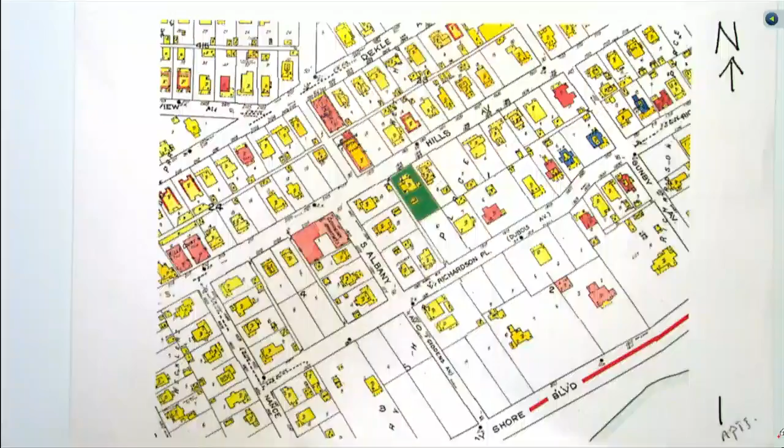This address here that faces Richardson comes off of Richardson. They don't use the alley for vehicular access, and neither does this one, and this one comes off of Hills. So that gives you the lay of the land about the activity on this alley.

Subject site is in the green box, faces Hills. The alley is indicated here, and it runs north and south. You see the infill property that's here, and then the accessory structure behind it.

This is the primary structure, and this is the front facade, which faces Hills. As we go to the east elevation, in the past they had put a shed component over here with an addition. Through the drawings this evening, you'll see that this is going to change, and this will have more of a gable roof line to mimic the historic structure.

This is moving to the west elevation. You see the original structure here, and then a series of one-story additions as it telescopes to the rear. This is the alley side, which is here, so this is the property in question over here.

As I indicated, the abutting property across the alley to the west, they don't use the alley, they come straight in. As you get a little deeper into the alley, you have the non-contributing accessory structure that's there. This is one of the better alleys as far as the condition of the surface.

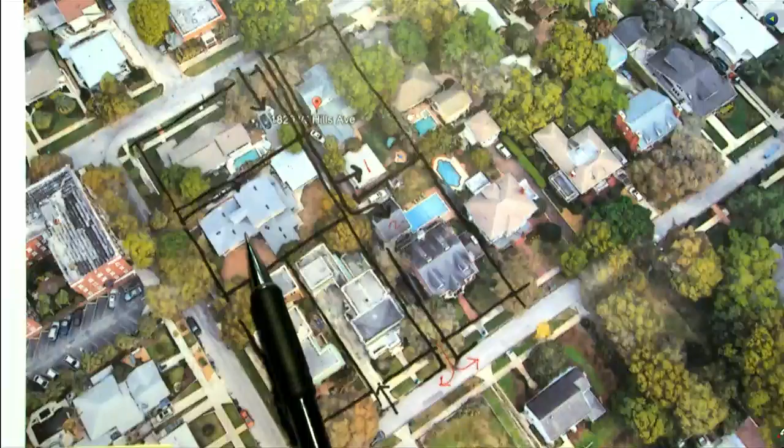I'm going to show some similar pictures to what Ron had shown. I'm trying to emphasize here that of the 5 parcels that are adjacent to the alley, only ours and the ones immediately behind have garage access off that alley.

And I'll show on this alley elevation, I've got some good images of the 2-story detached accessory structure to the south.

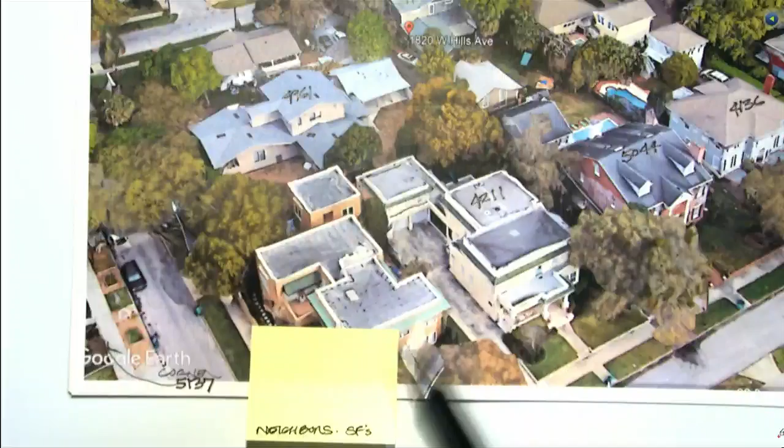I went to the property appraiser's website and downloaded this Google image. This is the property, and I wanted to just quickly look at the scale of some of the larger homes nearby. These are gross square footages that are identified: 4961, 4211, 5044, 4136, 5052, and over on this corner, not on the map, is 5137. So there are some large-scale homes immediately surrounding ours.

You can also see quite a few 2-story detached structures.

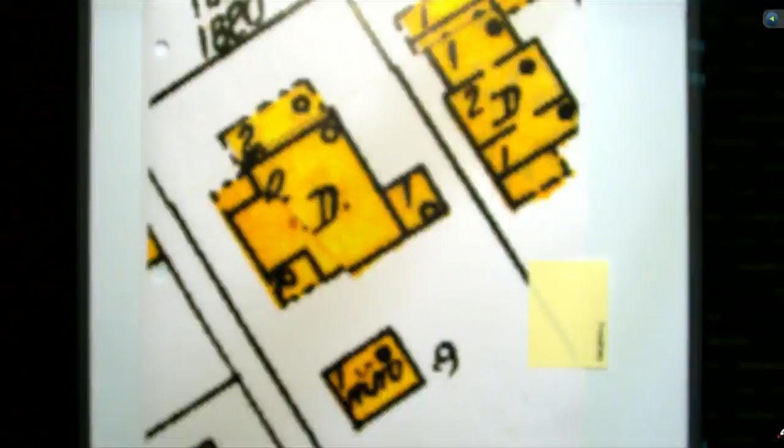This is an enlarged version of the Sanborn map, and I just quickly tried to get the accurate scale. This is the demo plan that I'll show you next. And you can see this is the original home, and part of what's now a carport appears to have been a one-car garage. So most of our demolition includes everything beyond this point here.

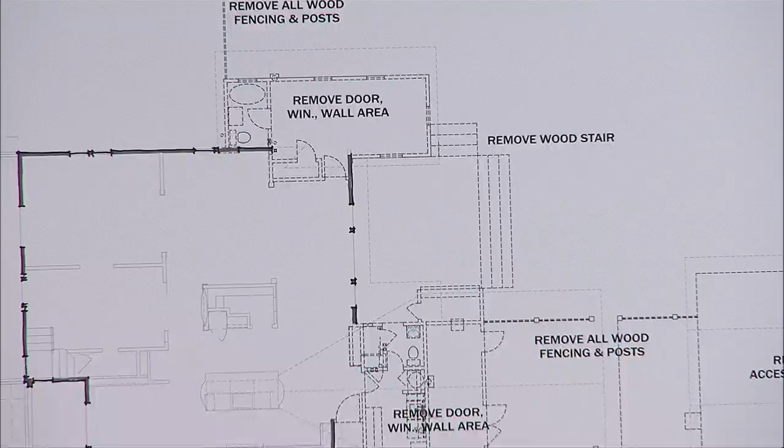So this is the demo plan, which includes removing the accessory structures, which is one story and very low, and has a lot of water problems.

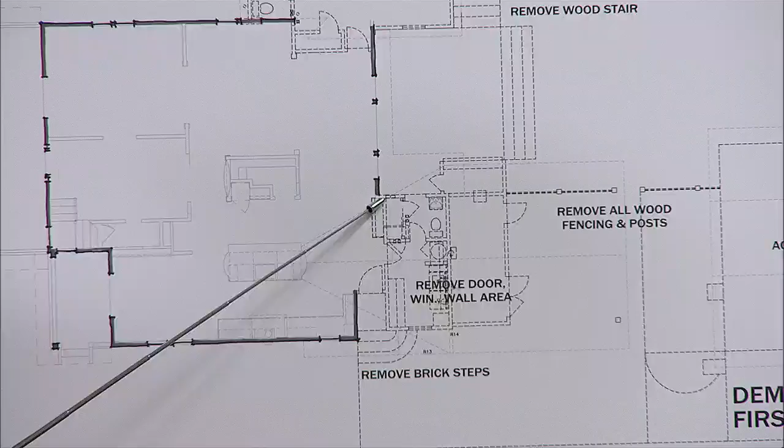Fencing, which divides the backyard, one generous one-car carport, covered storage, and part of the remodel was laundry room, powder bath, raised ipe deck, and this was an addition at some point other than what was original on the Sanborn map, but it's a step down, it's a low ceiling, the windows are smaller scale, and you'll see more of that as we go through the drawings.

So our goals are to maintain a large and private rear yard, two-car garage, laundry upstairs near all the bedrooms, larger covered outdoor living, outdoor kitchen, and additional bathroom. So with those goals in mind, how do we move forward to achieve them?

Proposed location for the addition. We demo the infill areas with multiple roof forms and differing materials. We've got metal, we've got shingles, we've got canvas awnings.

Here again, Ron showed most of this. You've got a lot going on. A good part of this view is disguised by the oak trees here, and there's a large one in the neighbor's front yard.

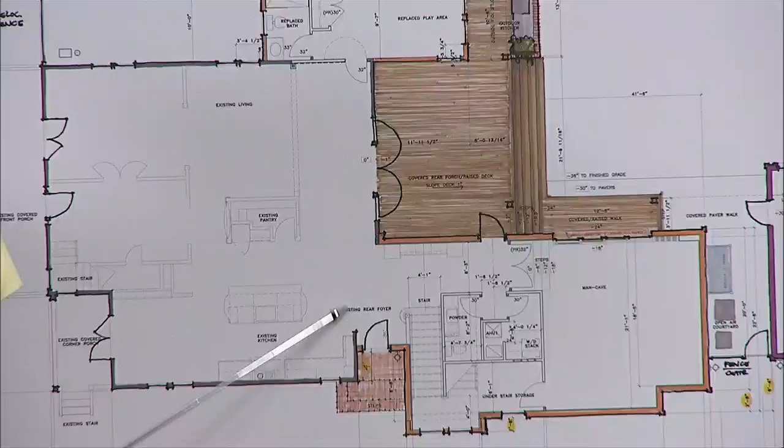So we're starting over again right here with a recess, a 4-foot recess. Then we come out and there's a 20-inch cantilever of a stair landing that takes us right to the 7-foot setback. Then we step back 20 inches. Then we step back another 32 inches.

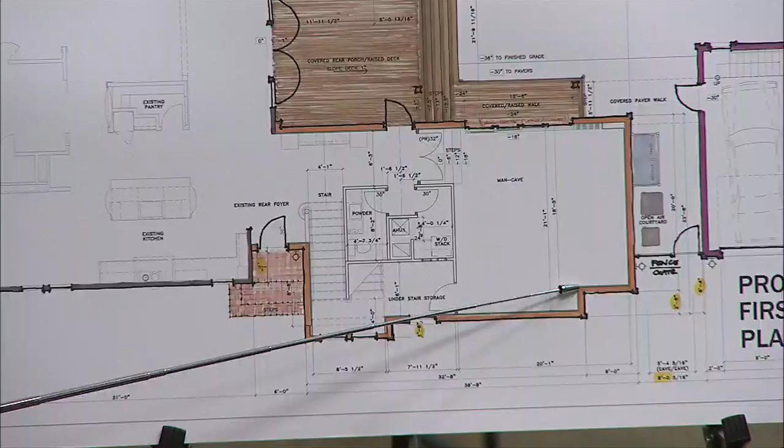Then we've got a space of 8 feet to the detached accessory structure, which is set back 15 feet from the alley property line. Currently, the detached accessory structure is only 11.5 feet.

Once again, there's quite an undulation of the facades here. We match that 4-foot recess where we start the addition, and we're coming out over the stair landing, which allows us to do 2 symmetrical bedrooms and arrive at the center line of that 2-story mass.

We step that back. We've got a window pattern that relates to the pairs all the way around. And the space now between the end of the 2nd-story addition and the detached structure is 18 feet. The 2nd story over the detached structure is set back 4 feet from the outside width of the garage.

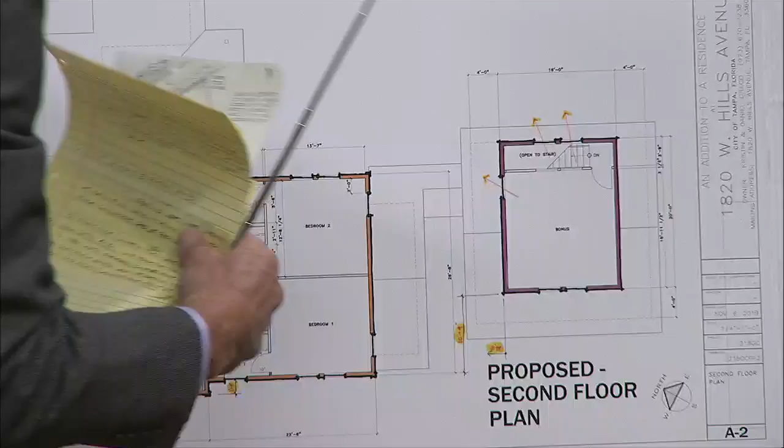Front elevation. We're going to rebuild the left north bedroom, which is here, existing, and we're going to reverse the slope with a perpendicular gable. We're going to match the floor elevation. We're going to match window head heights and match ceiling heights.

I've shown the approximate height of a 6-foot fence that we're going to relocate. There's the property line. On the right side, the only thing you'll see is you've got the recessed side entry, and then this stair landing projects out to the 7-foot setback.

Now, we'll probably spend quite a bit of time on this elevation. This is the alley elevation. The large oak tree that's on the property is approximately here.

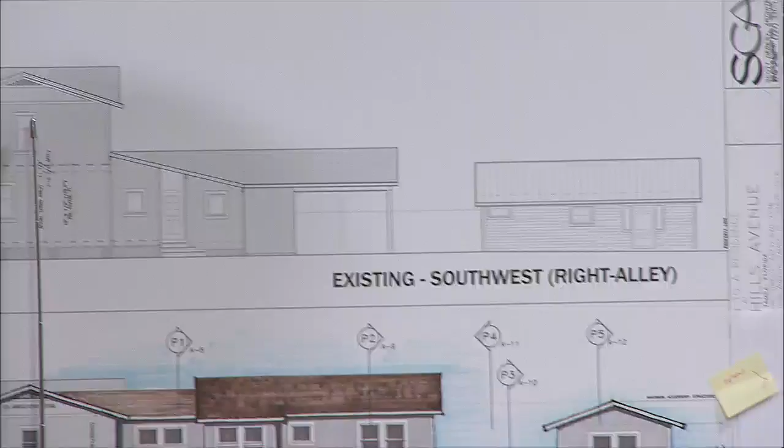Now, I've tried to render completely only the addition. I haven't put the gray color on the existing, but I have highlighted the windows. Okay, we start the transition with the recessed entry that's 4 feet back.

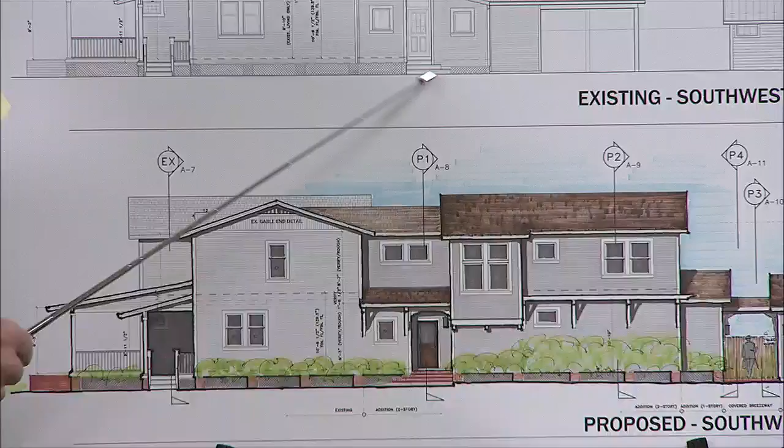Covered side entry, as it currently exists also. It's right here, we've got the recessed entry, but this is a little bit more generous. We also set back the 2nd story 4 feet so that this gable end is still the most prominent part of this elevation.

This is laundry room, which explains, there's a counter immediately underneath those windows, which explains the height of those windows, or the fact that they're more square than vertical.

And we introduced knee braces here that give it kind of a human scale element, which we repeat farther down as kind of an arbor that projects out about a foot to break up the 2-story facade here. So this projecting stair landing is coming at you 20 inches.

One more step here at the end, and we transition down to a 1-story roof before the space, which has a breezeway connection near the back of the space, and then the 1.5-story garage starts.

So as a composition, you've got the most prominent gable here, you've got what we feel is an interesting facade here, and it transitions and gradates and comes back up with a minor gable here, and then kind of ends the composition. And we hold that 5 feet from the rear property line, which is consistent with where it's at right now.

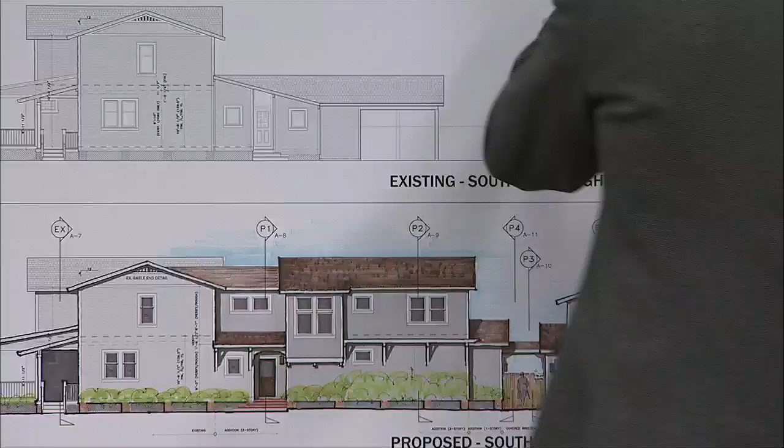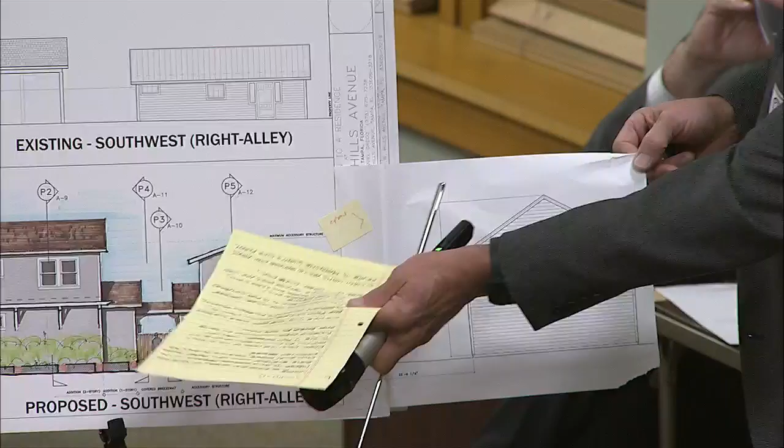I physically measured the neighbor's detached structure. It's 23 feet away from the property line and approximately 26 feet high. I felt it was important to show the massing that's adjacent to what we're doing.

I think this is a very acceptable 1.5-story accessory structure compared to this one. We repeat coach lights at the side entry, one on each side of the garage front, and also in line in this courtyard area.

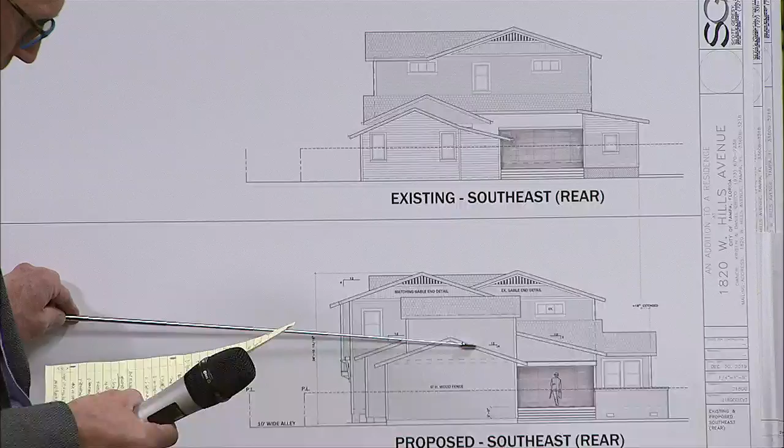We feel it's important, to be sensitive to the neighbors, that no windows would occur on this back elevation, which is 5 feet away, 9 feet away from the neighbor's fence, looking down into their rear yard, both from the garage and from the 2nd-story loft space.

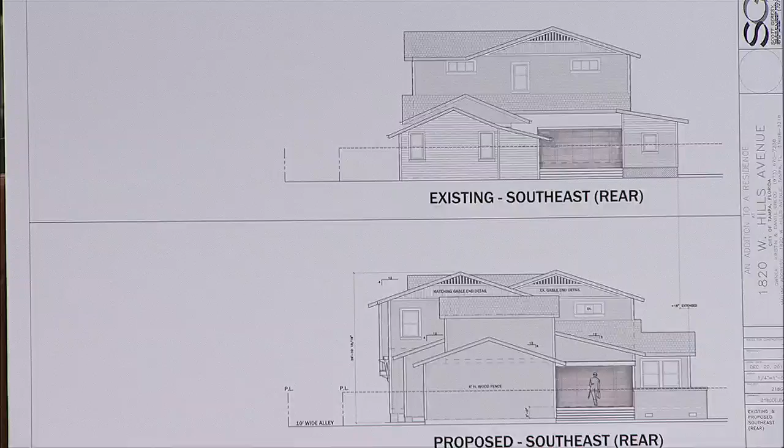This is the elevation in the backyard. What was existing was the lower floor, the lower windows, rafter tails exposed only here on the entire project. You've got metal roofing, and then back here you've got another canvas awning.

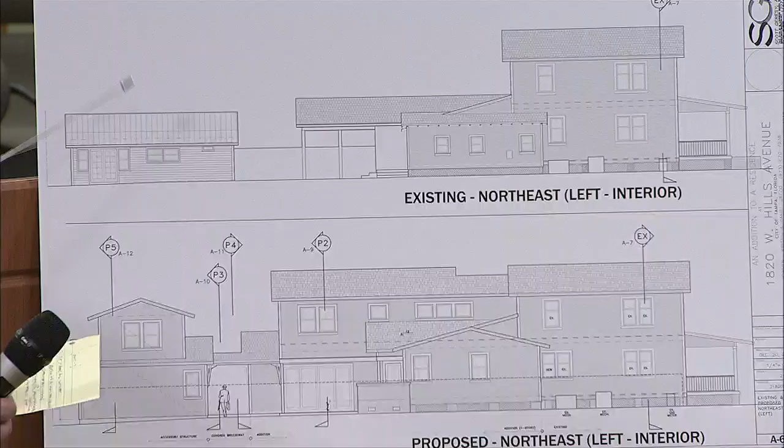So we feel the improvements are: we're now matching the floor elevation with this playroom, which is really rebuilt in the same spot with a gable, perpendicular gable, coming at you instead of facing the front. Better matching window sizes here compared to these. And we feel the accessory structure is an integral part of the whole composition compared to what it used to be.

And we're going to relocate. There's a fence coming off right here. We're going to move that to the front and it'll conceal these mechanical units, and I'll show you pictures of that. There's also a gas meter there.

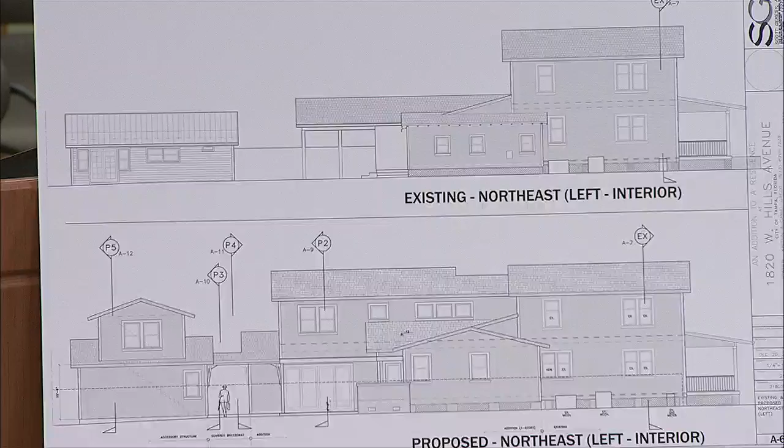Site improvements: new fence, utility and trash area with the gate. In between now, we've got new fencing that occurs here. The existing fence is here, we're moving it to here. We're continuing that wood fence there. The fence and gate reoccur here, which creates a little courtyard for new mechanical and trash between the two structures, and a gate wood fence here. So you've got fenced area all around here.

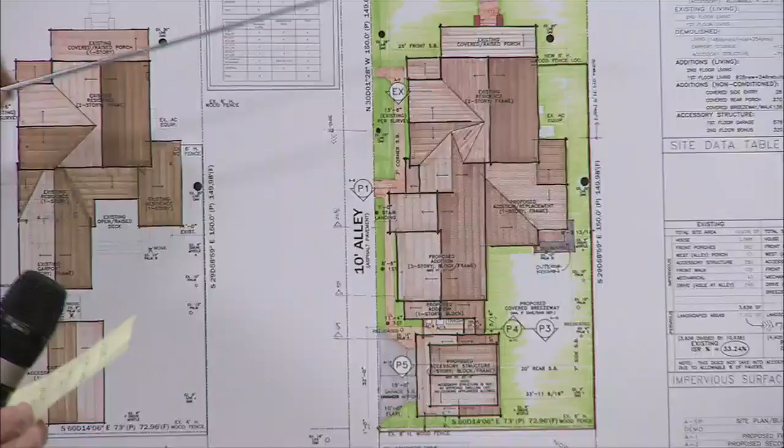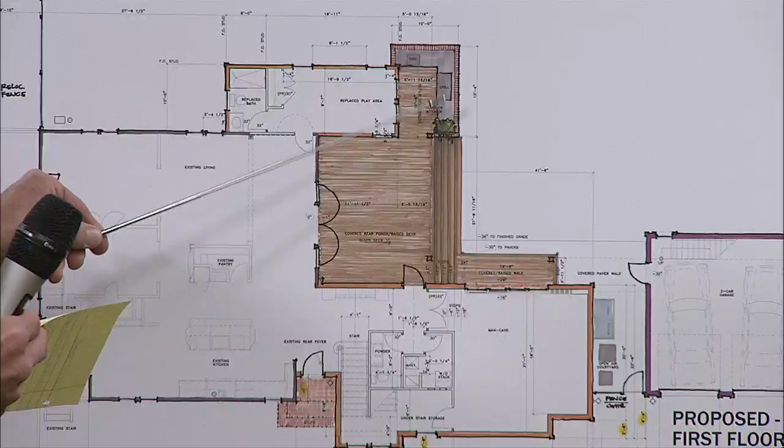We're also doing an outdoor kitchen in this area, which occurs here, just an extension of the deck. The roof overhang is here, so that's uncovered area. We've got a grill and sink, all kind of open to the backyard.

The rehabilitation of the primary structure: in 2012, we had new roofing and exterior painting occur. Stem wall.

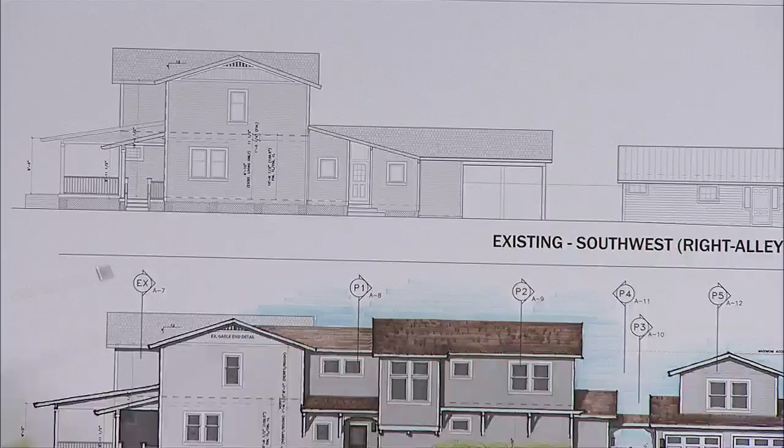I'll show you some pictures. We've got some brick piers, some block piers, some precast piers. All of those are covered by a white plastic lattice completely on the outside of them. We're proposing to re-express those, clean up the brick that's there, put a matching thin brick veneer over the block ones to keep them as flush as possible, and then repeat the red brick veneer on new concrete block piers where we've got the new addition.

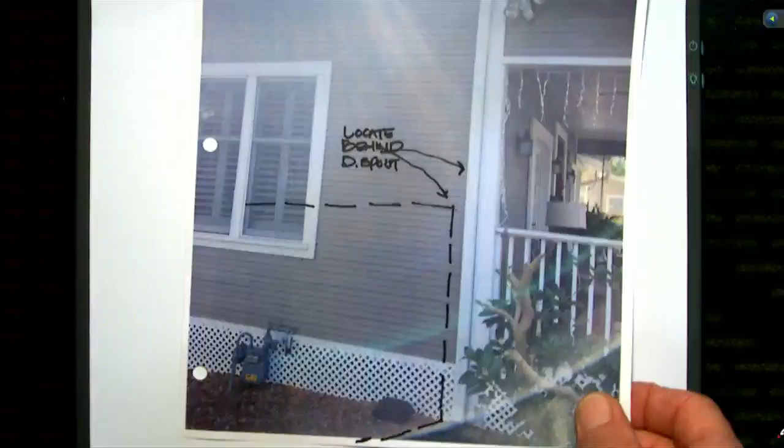Fencing: front left side of the house, this is the one-story addition. You can see the mechanical units. Closer view: we're going to pull this fence forward to this spot here, which is behind the tree, and it hits that corner of the house approximately there behind the downspout. There's the meter.

Details. Our design detail vocabulary includes 4 in 12 slopes, flatter at the front porches with shingle roofing. Typical overhang.

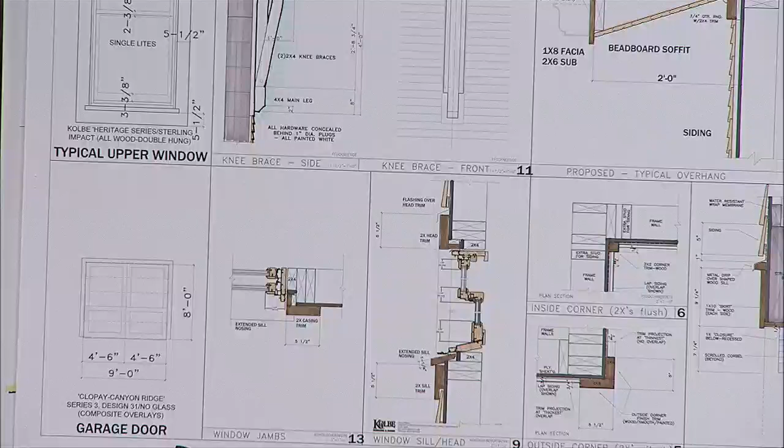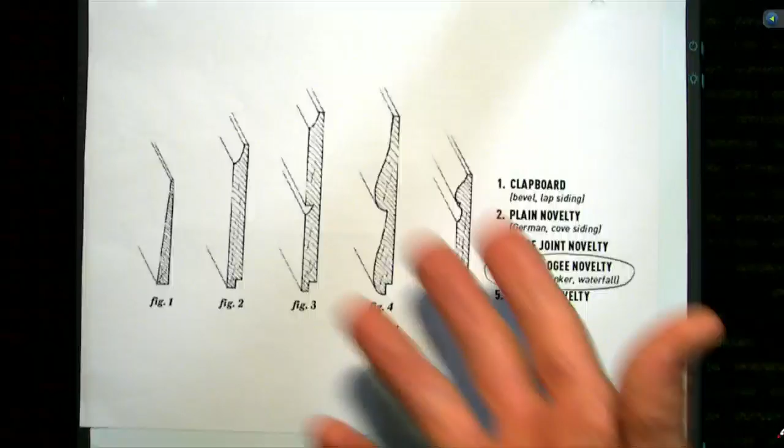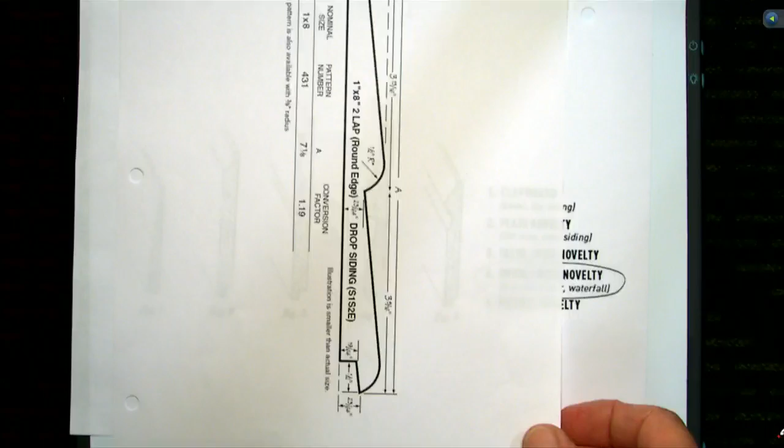Our siding is 5 inches, and in this example they call it a double ogee novelty Boston Clinker waterfall. Here's another dimensioned manufacturer's cut of it, and here's another one. You see quite a bit of that in the immediate area.

Windows, Kolbe, wood. This is an exterior wood product that's got a Kynar 2 finish on it.

Front door, very nice, dark stained wood, 2 panel, 6 light front door. The existing side door is now that, and on that elevation our intention is the new side door would be a natural wood stained 2 panel, 1 light door also.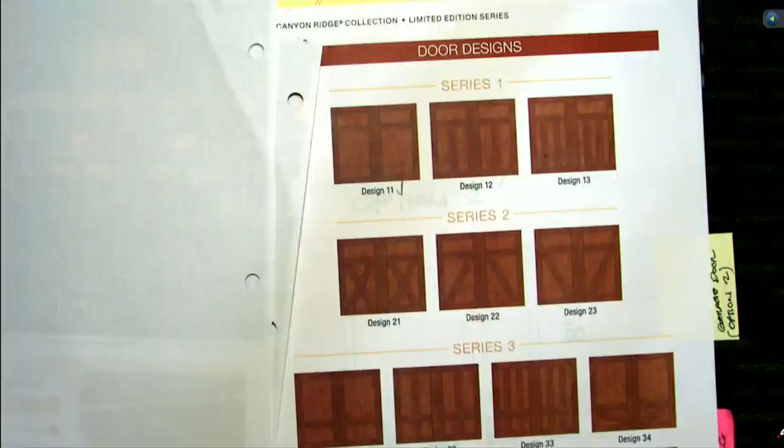Garage door: Canyon Ridge, it's an aluminum door with a composite grain trim on it. I'm showing 6 panels with 2 lights, with 3 lights each. Or...

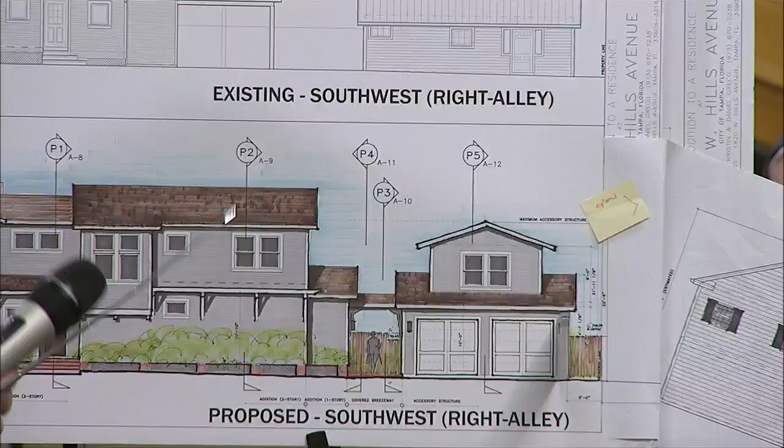This look is 2 columns, 2 panels - it's a little squattier look, and we're prepared to go either way. This would be a more costly door; obviously it kind of extends it a little more vertically.

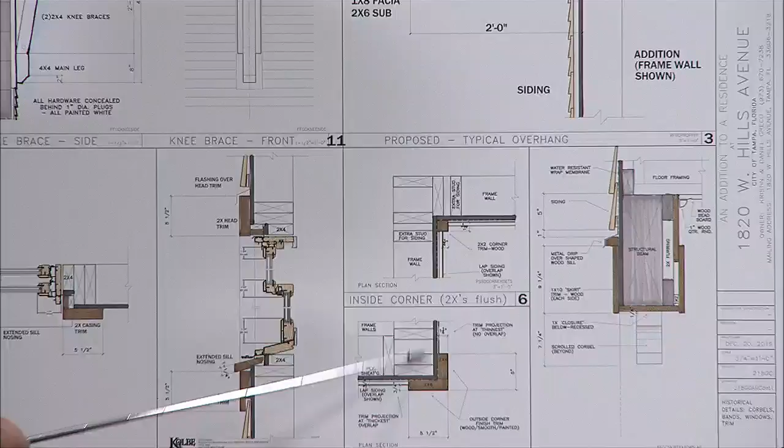So, details. There is the typical overhang we're proposing trim here. There's the waterfall siding, beadboard soffit, fascia, where we've got overhangs, 2nd-story overhangs over covered walkways. We do a skirt board trim, all painted white. Outside corners with 2 bys, so the minimum projection where you've got lap siding is 3/4 of an inch.

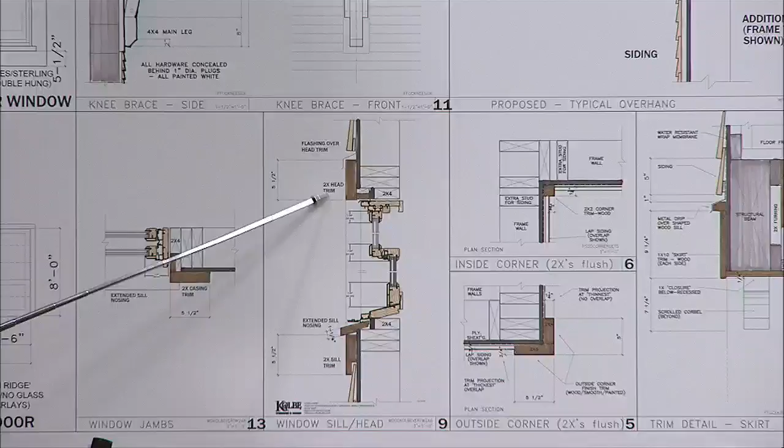An interior 2x2. Here's the window section detail where we've got 5.5 inch trim underneath and an extended nosing, 5.5 inches up top, and just a metal flashing over top. This is the most consistent detail on the house, and casing trim is 2x6.

Corbels. We're doing this with a 4x4 main leg and 2x4 knee braces sandwiched on each side, with a 4x8 corbel here, and two 2x8s atop.

I am finished, I think, and ready for questions. Thank you.

Good evening, Commissioners. Ron Vila, I'm staff with Historic Preservation. Staff's finding that this project is consistent with the Hyde Park design guidelines with the previous plans that were submitted. There were some modifications made between the submission date and today's public hearing. As Scott alluded to, we met many times to have these drawings consistent with our criteria.

As we go to page 3 of the staff report, I wanted to address some of our earlier concerns, reflected in the bullet items. On the original plans, there was no dimension on the alley side where the addition was, and we had some concerns that there might be the need for a variance. After further review, there is no need for a variance - this whole project is moving forward with no variance request.

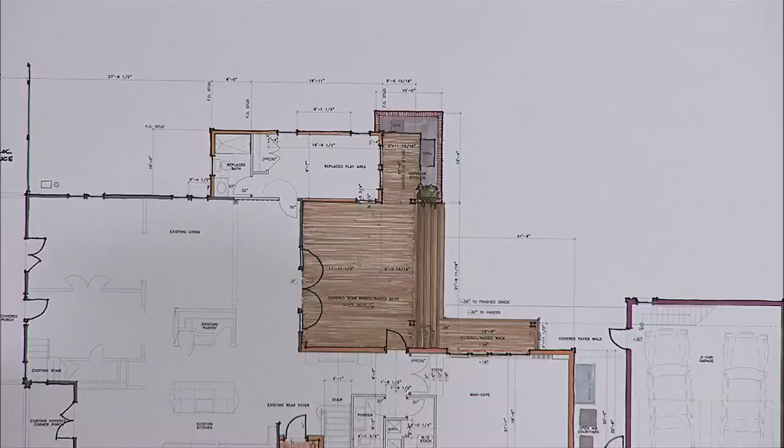Let me start by saying I rendered the existing roof plan only to make a point, which I'll get to at my closing. Right now, this is Chicago brick paver sidewalk here, all Chicago brick pavers here, and this becomes asphalt to here—so basically this is all paved now. In the end, we've got the same Chicago brick sidewalk, which we extend here. The new steps coming down out of this side entry are Chicago brick to that walkway. Then a minor walkway continues to this area, which is in the courtyard, and then a concrete apron.

We've discussed the right material for this and the abuse this alley gets with the trash trucks—they just spent a lot of money on that alley. So am I to understand you'll be salvaging a lot of this existing Chicago brick for reuse in other locations on the site? That sounds wonderful, yes. Is that your intent, or is that something we should bring to the table? Yeah, we may have to sell some of it.

Sure, I've got some pretty good pictures—I can show you the amount that's there now, and also the new walkways. You're augmenting this, I guess, with the apron and driveway with a colored dimensional concrete brick block surface, or is this going to be a monolithic concrete surface?

That's to be determined. Thank you very much. We're open for suggestions—I'd like to see at least the same brick border if it's a concrete apron. Thank you very much. Thank you.

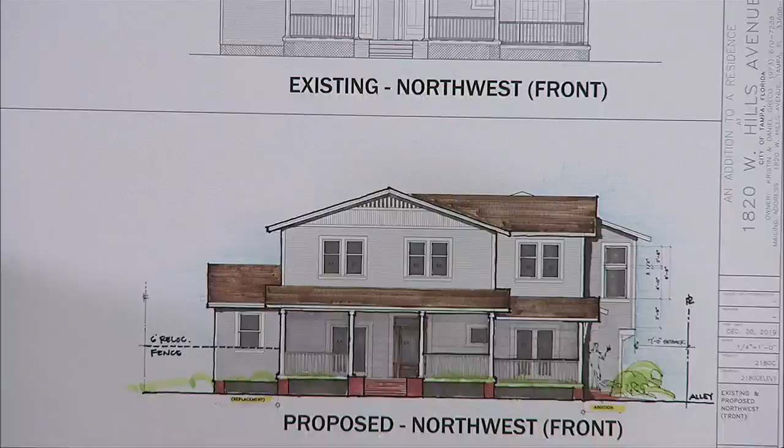I'm just curious. Can I refer to this? Yeah, sure. I have a folder full of schematic sketches and virtual model images studying this, and that probably represents half of what I actually did. And we did explore a two-story form here.

We weren't trying to squeeze as close to the setback as we could. And these push and shoves probably started out at 4 feet and then became 2 feet and then it became a little bit less.

So that little 20 inches really made a big difference at your arrival point upstairs. And I think it's kind of an interesting projection personally. Okay.

And then while we're at it, this is another elevation I had some questions about. I may have missed it, you may have said it. The brackets, what kind of material are those? Are they wood or metal? Painted wood. Painted wood? Yeah.

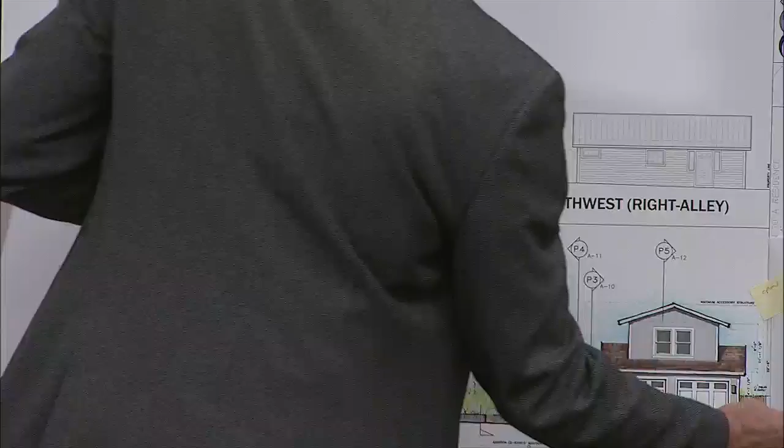Okay, great. And then you answered my question about the stairs. I would just list a preference, not really a question, but I do like your first doors with the windows, but we can discuss that as a board later.

On the left elevation, Ron mentioned this, the doors. Did you have a sample of those doors that were sliding at one point, but maybe no longer? Well, I don't, I'll show you my markup on the plan.

Here are those doors. That's four single light panels, and that is a man cave. Delightful. The idea is that it's an indoor-outdoor space, versatile.

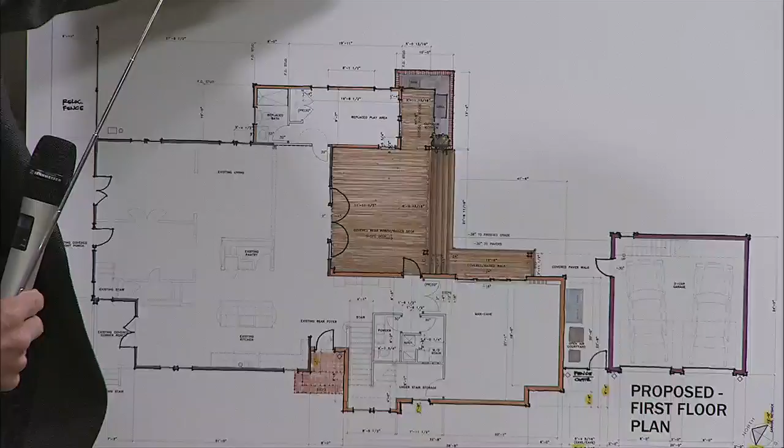I can't tell you what manufacturer it will be, but it's a single light panel. Okay.

Can I ask one question on that real quick? Yeah. Besides sliding doors, have you looked at a system like an accordion where it looks like 4 doors? Yeah, that's possible, getting that to stack.

There's not a good spot. Here's stairs coming down, so stacking it here is in the way. Stacking it there is kind of dangerous. Maybe stacking it here would be okay. I got to believe that an accordion door is going to be more expensive than a sliding door that ends up in the same plane.

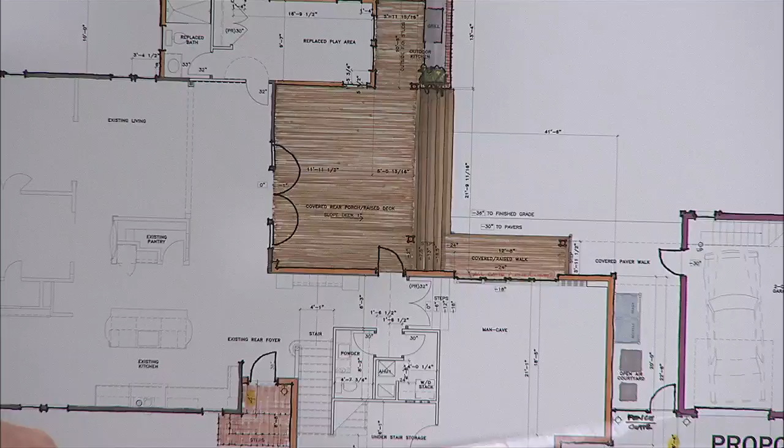Okay. To your accessory structure, is there a reason other than privacy to not have windows that face the adjacent property? Let me start with the ground floor. I'm glad you asked that question because I think there is. It's not an oversized garage, it's 24 feet square, and I showed standard size vehicles, and we're trying to get a 3-foot wide stair going up. This seemed like a logical spot for a window facing the backyard.

As you start to go up the stair, you get a quick peek in the backyard. The only remaining corner of the garage for storage is here, and it's going to be jam-packed full. So I think we'd like to give up on a window there because it's just going to get really disgusting. The second story...

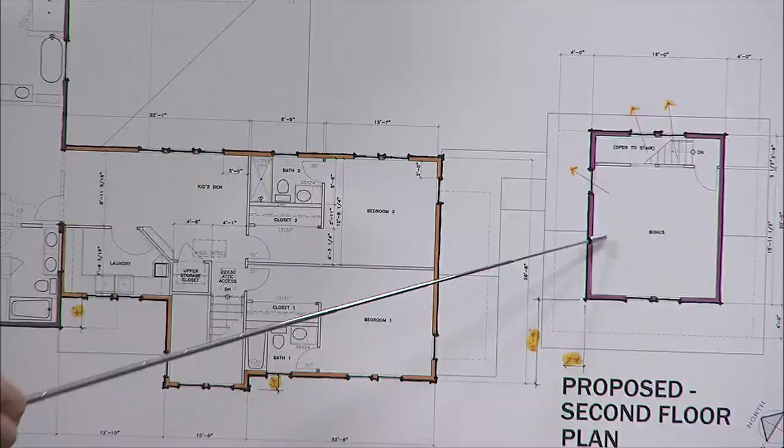It's one space with the stair aisle or whatever. So if this is conditioned space, these windows here will look out these windows. We got a window here, so we're really encouraging the views to our backyard, which is why I've highlighted those arrows. We've got a pair of windows here, a window here, a pair of windows there. The only place we don't have windows is here.

Is there a couch wall? Is there a TV wall? That's probably a couch wall or a bed wall.

And do you have the photos of the original accessory structure that you could put up again, if you don't mind? You want to see the ones with the windows? Yeah, that one. And did it have windows on each side or no? It does. Okay.

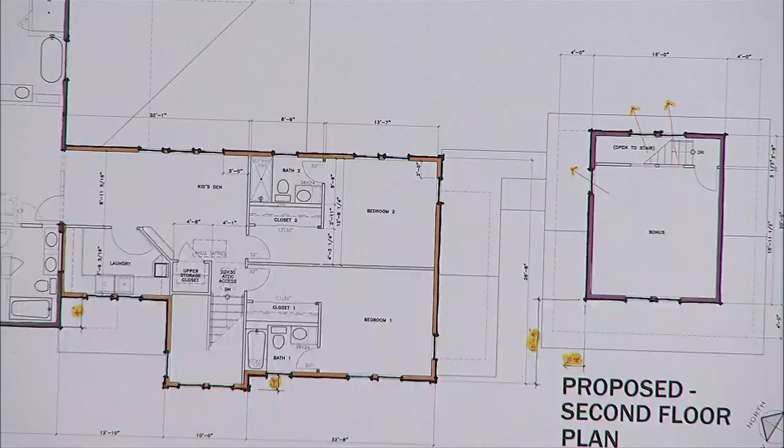Yeah, there are two, probably single hung windows there. Okay, great. Thank you, that's all the questions I have for right now. I think you've answered all my questions. Those windows, and same as far as the garage door is concerned, I like that first one with the 3 lights. That's it.

I have a few questions. First goes to precedents, so there's a couple. The corbels and the bracketing are not consistent with the primary structure itself and in the existing conditions. I was wondering if you have a series of precedents or case studies that show any in the district that are consistent with the vernacular frame style that this home is in, as well as the projected condition for the portion of the stair for the new addition. Both of those elements seem very foreign to this project. So if you have that case study precedent, it would be great if you could present that.

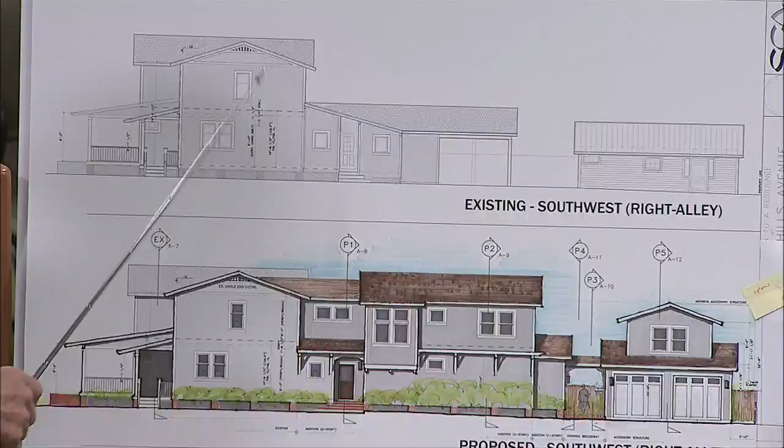Oh, part of the remodel in 2012 was a kitchen remodel, and the kitchen counter is continuous here, so I can't change that. And you were retaining that in the project? I'm sorry, can you go back to the plan? Yeah, I don't tend to look too much at the interiors when we're presented all of the conditions, because we're not really seeing that second story gable, the edge of it is there. Okay, and this was part of the 2012 project, which is very nice.

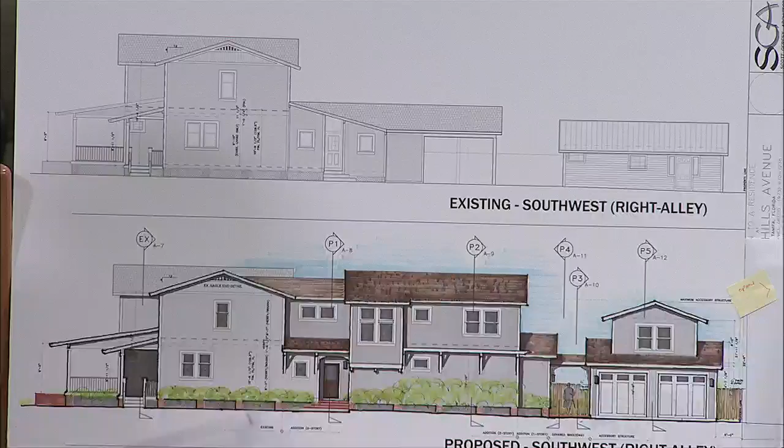All right, okay, that makes more sense now. That's it from, I didn't think maintaining the trim there was important. Maybe a tall tree or something there would help. That's it for my questions and comments right now. Thank you.

I also have a couple questions for you. So the proposed southwest, or right alley elevation, that's up on the board right now.

I have a question. So the landscaping that we're showing on this, that's on the new two-story addition, is that to hide the fact that there's no windows on that wall? Yeah, there's about 3 or 4 foot wide planter there adjacent to the building, so it's probably a ligustrum or something hedge.

Was there discussion at any point to include more windows along that first floor of the new two-story addition, to break it up a lot? Yeah, there was discussion. It's a man cave, it's football, it's baseball, I guess it's a private space for TV viewing, so someone walking by the alley and having a shot in it, it's really not what they were after. But we are open for adjustments.

Let me show you the plan again of that space. And even this step is difficult in the room, but we felt like it was helpful in the transition to kind of open this up versus completing that corner. And it's where it changes from a 2-story gable to a 1-story gable.

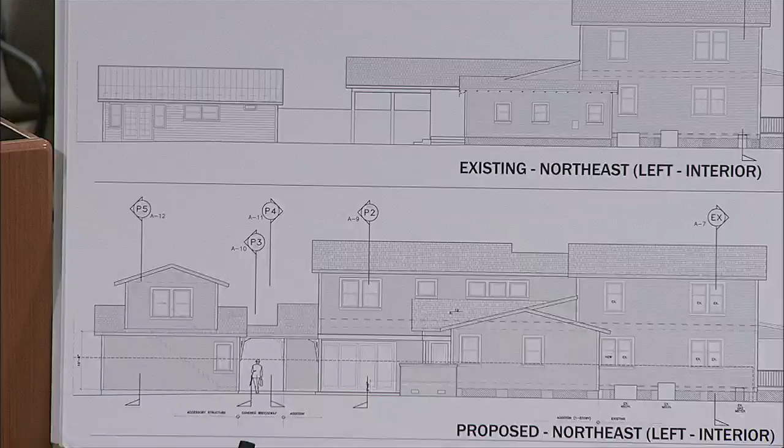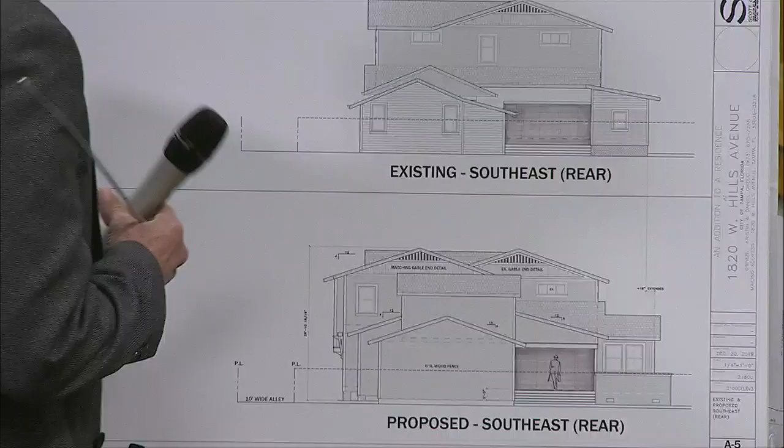So if we go then to the southeast elevation that you just had up, that same man cave area has the piers. You can sort of see it on the bottom proposed, on that one back corner right there. And then it does also have it on the alley side. Where does that stop, that pier? So it may need to be something you kind of show on the plan if it's easier. But at some point here it disappears. Yeah, because on this one it shows that it's now the same height.

I have 5 wall sections that I didn't get to. I can show you that one and in general what's going to happen there. But this is a block wall for the story, and this is a recess that's created, and it appears to be a foundation vent in this area. My biggest question is, it appears that it does not wrap around the entire house.

So the question is, is that intentional for a reason, or what is the intention? And then in some elevations, that foundation line that wraps all the way around is at different heights. That detail probably disappears when you get behind this fence, somewhere back in here. Probably right there.

Next question that I have for you, we can stay on this one for now. So there is a portion of the second floor that sits over this kind of open, covered rear porch. It looks like from here, I'm assuming that tiny little square up at the top is a column. Am I reading that correctly? Yeah, that's a column supporting the covered porch.

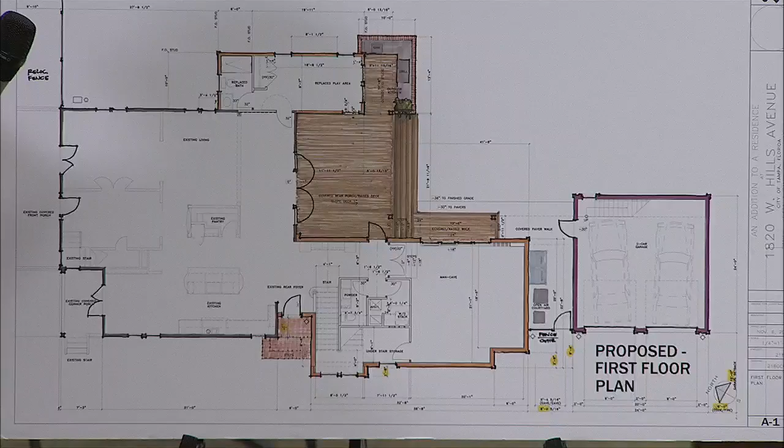Maybe a little bit less. Okay, and then is it just a brick cap on that as well? Yes, brick cap on top. Okay, I mean, it could be an 8-inch brick wall, solid brick. And is the idea to screen it? We're going to have built-in cabinetry behind it.

I have no further questions at this point. Any additional comments or questions for the applicant before we close the hearing?

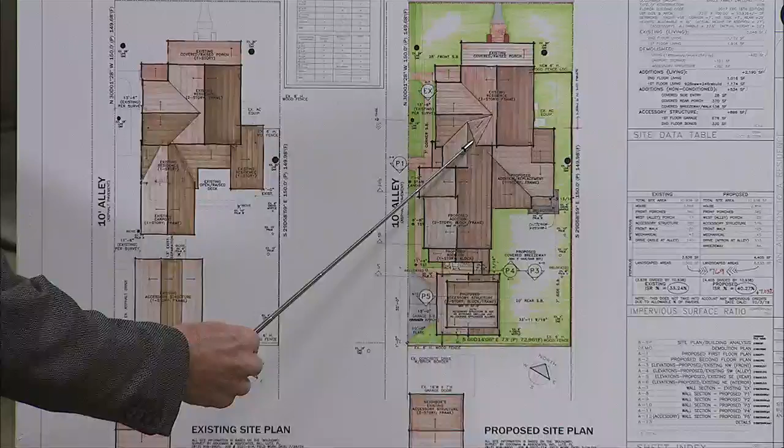I have one additional question, sir, respecting your roofing materials. Is it your intention with this extensive addition to match existing roofing materials, or are you going to be re-roofing this entire structure? That roof is new in 2012. Color-wise, it works with the color that's there now. Here's existing that remains, so we're just overlaying a little bit of that, so I guess we would probably tend to match it.

That'd be for the main structure as well as for the accessory? Yes, yes. Thank you.

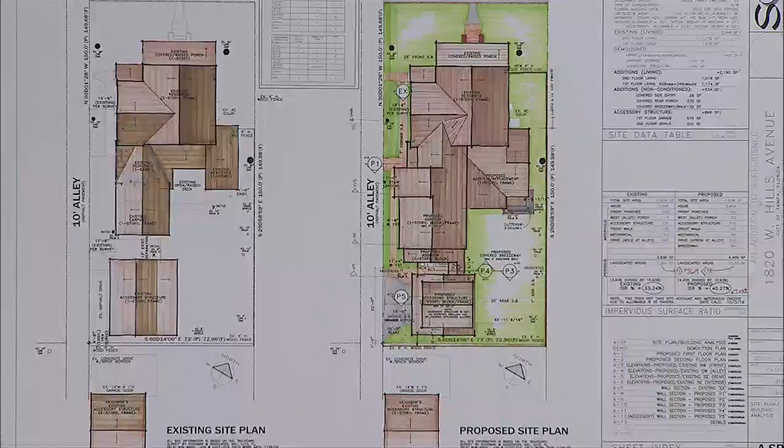And then I guess I have one more comment. You did mention that you had wall sections that you did not get to. Would you like to present those? Yeah, quickly. So here's the locations of them. I've got one through the existing wall here, one through the side porch entry here, two through the breezeway, and one through the accessory structure.

Existing, approximately 30 inches out of the ground, floor to ceiling is 9-10, 2x floor framing, 8-7 second story, 4 and 12 slope, about a 20-inch overhang. I'm sorry, the overhang is actually sloped.

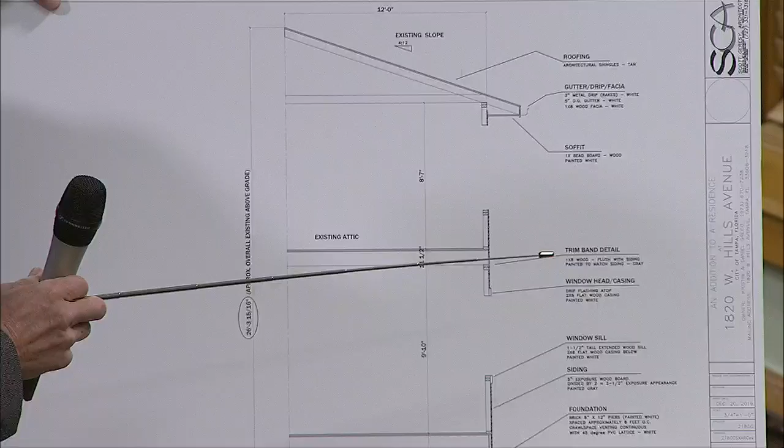Here's through the side entry. We've got the beadboard soffit, 4 and 12, beam wrapped, corbel, and we're matching this elevation obviously, and we're going 8-7 to match what's existing upstairs, so the bearing height is the same.

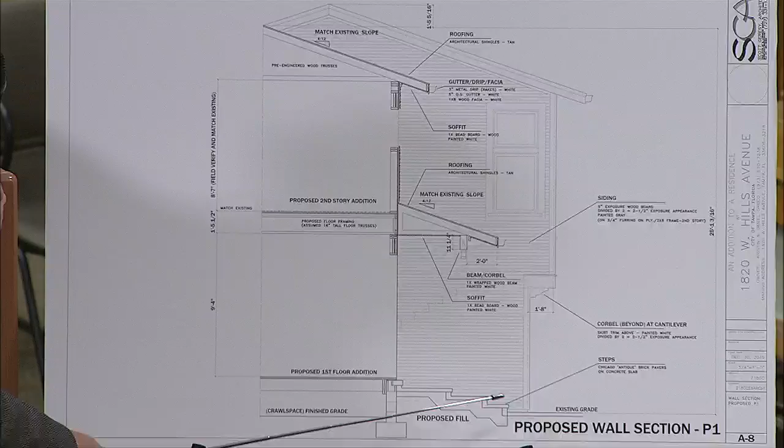Here we've got the brick on concrete slab. That's really the side elevation completely of that recess, and the stair landing. The stair landing is coming up right to here. So these windows give you a nice view down the alley and towards the front street.

This is through the man cave, and this is where we're playing the game to fake the recessed crawl space detail. It's the back area where we've got the wrapped beam, siding, 4 and 12. And there's the bracket.

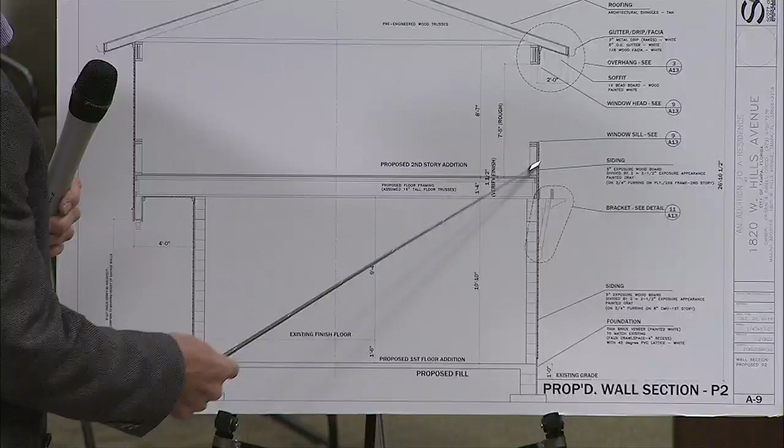And this is the breezeway. Through the breezeway, 7 foot out to out. We've got those brackets, the knee braces there and there, and this roof is independent of this one and just kind of plugs into the side wall. There's another window up here you see.

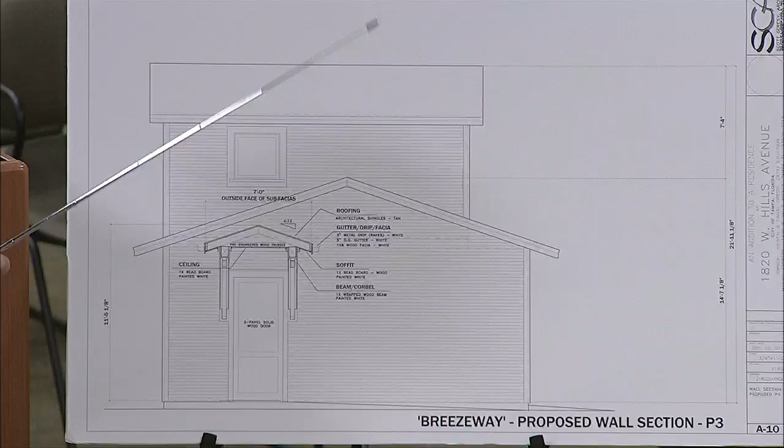Cutting through and looking the other direction through the breezeway, this is the walk under past the man cave and into the back of the house. And this is an extension of this roof plane over the 1-story man cave portion.

And lastly, accessory structure, we got a 10-foot garage ceiling height. And we've got only an 8-foot high space above it. And we're set back 4 feet in from the front of the garage for the 2nd story.

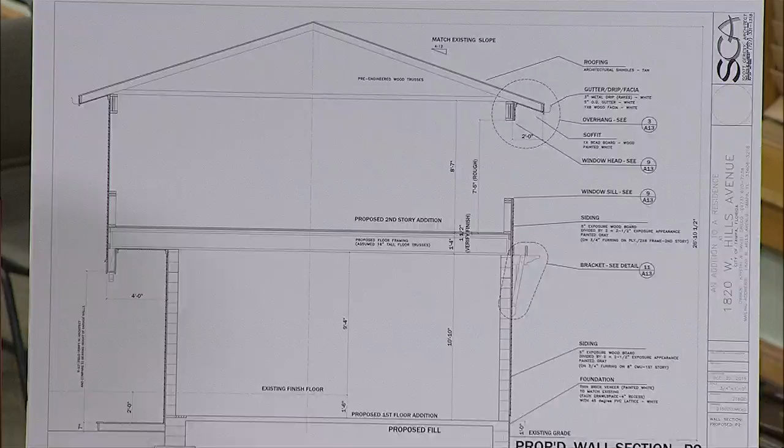Could you go to your section, I think it's labeled P2. Your bracket detail that says A1311. See the brackets, and then it looks like there's wood that goes above it. Yes. What is that holding? These here? Yes.

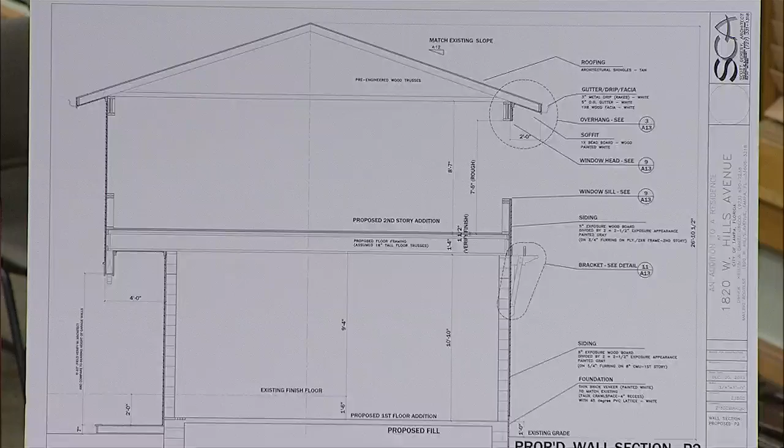It's not holding, it's a decorative horizontal line is what it is here, to give some shadow on the wall. Okay.

Are there any other additional questions? All right, if not, at this point, the applicant is allowed 5 minutes for rebuttal.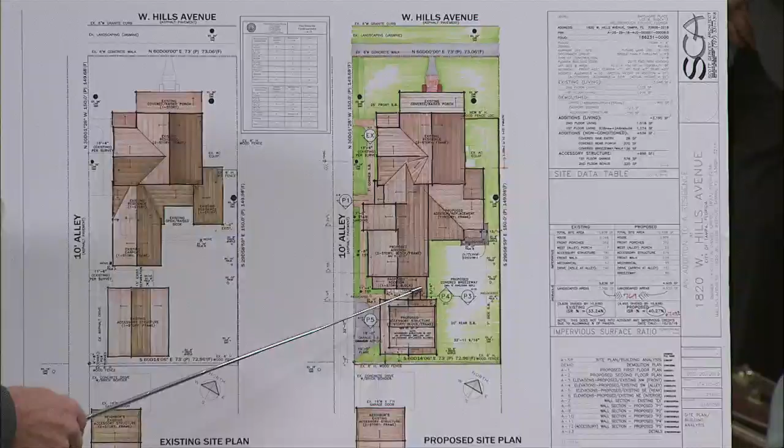I guess what I wanted to say was, if you glance at the site plan, the existing and the new, they're really not that different. This is a 2,000 square foot addition, but the change in impervious surface with this scheme versus the original is 7%, a difference of 769 square feet. In the grand scheme of things, we achieve a lot of square footage, rebuilding the usable space in the accessory structure in a more efficient way. We maintain our large backyard, and we feel like we've achieved our goals and been sensitive to the neighbors.

Thank you. At this point, we will close the public hearing, and the commissioners will discuss the case. Would anyone like to start? Okay, you can go ahead.

Let me start with a couple comments. The first two are going to be a very personal opinion, line items that I know other people are going to have some major comments on. The garage...

facing the alleyway, I personally like what it looks like as presented on the drawings. I believe that upper level gable facing you has a certain bookend quality with respect to the gable facing the alleyway from the main original building. I like the way it balances out the whole composition as you walk down the entire side of this site.

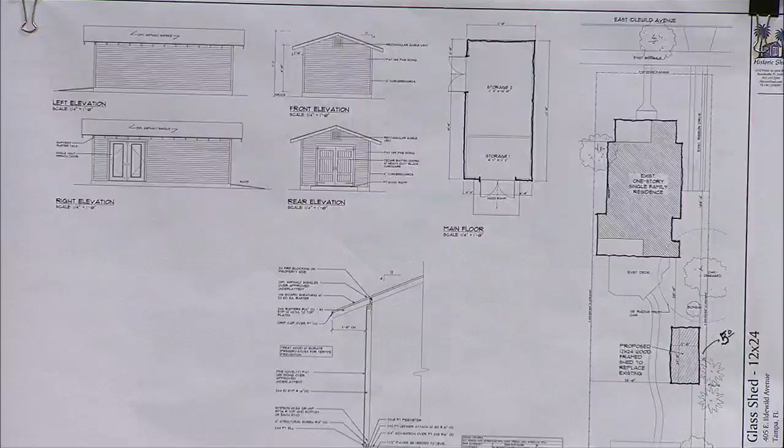Trim boards, everything would be SmartSide. We've been moving away from real wood for a lot of our trim. I have a sample if anybody wants it. Lots of reasons for that, but you don't need to hear all that.

Same roof slope as the main house, 4-in-12, and it would have exposed rafter tails. We do full 1-inch by 6-inch board sheathing for all of our roofs, so you would be able to see that, and I'll show you some photos of that.

Simple fenestration, it just has the front area. It's going to be kind of a workshop/home office area, and just has a set of French doors, single light. And then on the rear we'd be putting in a set of batten doors, and that would just be for access, say lawnmower storage, or your more traditional shed items.

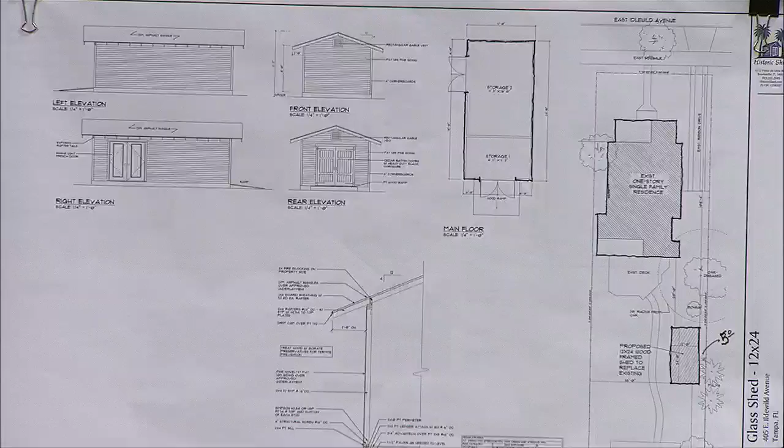So just to give you an idea of the type of materials and the like - these, we build our own doors in-house. They're made out of cedar, heavy-duty hinges. I thought I had more examples of that, but you can get an idea of what they look like when they're done.

The double set of doors, we do a couple different variations. We haven't really tweaked what style they'd be, but we have some that are a little more mission style. None of them have any windows, they're just straightforward batten doors like this.

French doors, we have been moving away from real wood French doors. We have found some fiberglass doors. I don't know if you can see that well enough, and I apologize because it still has tape around the edge, but it has all the same details. It doesn't have that - what's the word I want to use - the windows that have the frame around it that doesn't paint, it's white. We don't have any of that. All the details on this look exactly the same as a wood door once it gets in and gets painted. So it's made by Therma-Tru.

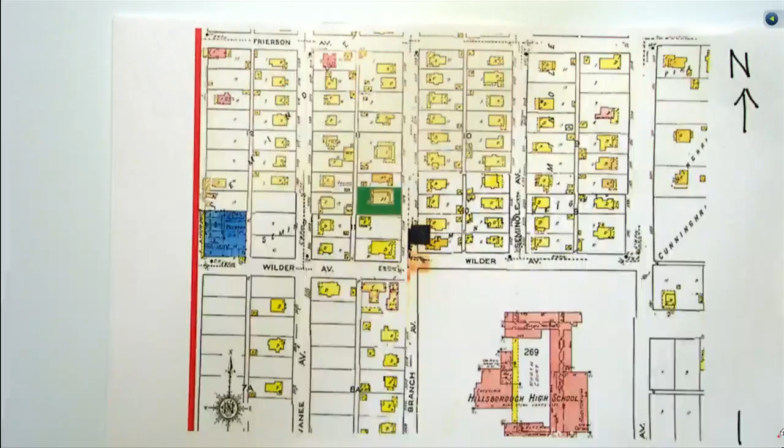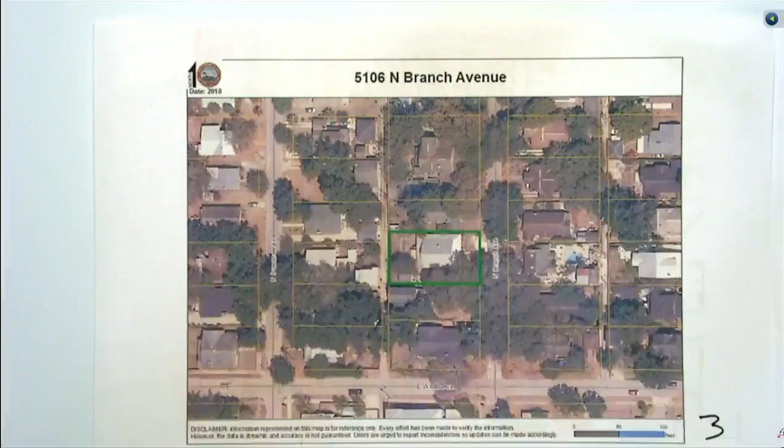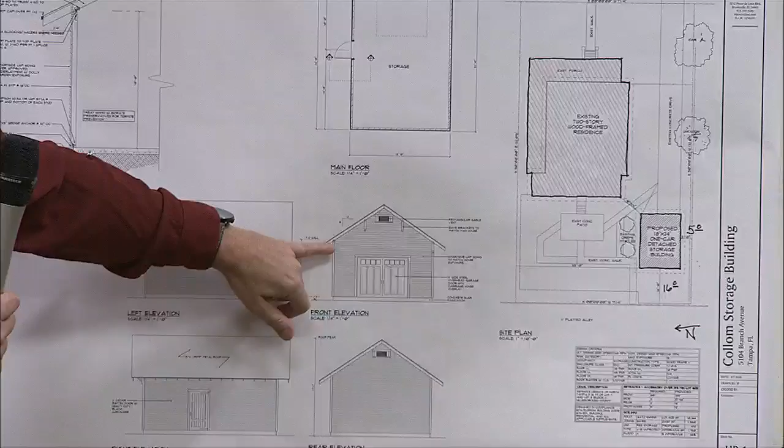We would replicate the 4 brackets from the house and place them similarly, but we're not going to bother on the back side. People won't see it; it's not the primary facade.

Metal roof, 5V crimp, like before, exposed rafter tails, same roof sheathing detail with the board sheathing. Simple cut rafters. I know he showed you those really nice rafter tails on the main house, but we're not planning on replicating that on this. Accessory structures are usually a step-down version from the main house in areas like this.

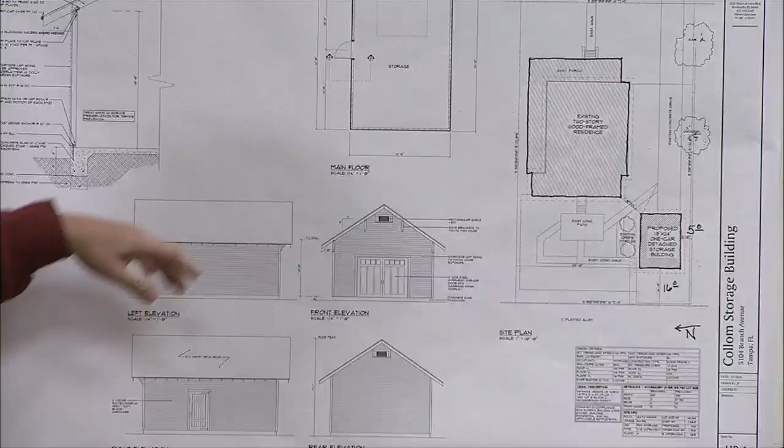Overhead garage door, 9-foot wide. I'll show you examples of the standard garage doors we use, and then just a simple batten door on the side, same detail as what I showed you before. And a gable vent—we talked similar design; it would be proportional to the one that's on the main house.

Just so you can see, it's very difficult to take a good photo of the backyard the way it is right now, but there is a non-contributing, non-historic shed in the location that we'll be going. Just so you get a sense, there's a fair amount of landscaping back there.

I had shown you this door detail. We would again be building that similar kind of door. And if you look at the siding on this, that is the example of replicating the Dolly Varden - it just happens to be skinny lap siding instead.

The garage doors we typically use - this one a lot of people are familiar with because it's very prominent in the street - it's a CHI overhead door. I like the window details. It is a steel door with a carriage house overlay. It's got a good look to it. Here's another example of it in use, and I'm pretty picky about garage doors, so it's the one I can live with.

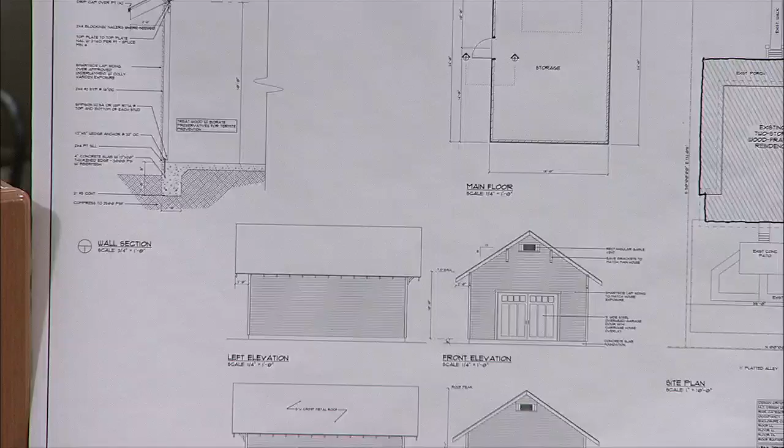So in terms of the driveway, that follows up to my site question in terms of the driveway. If we could go back to the right side of the board.

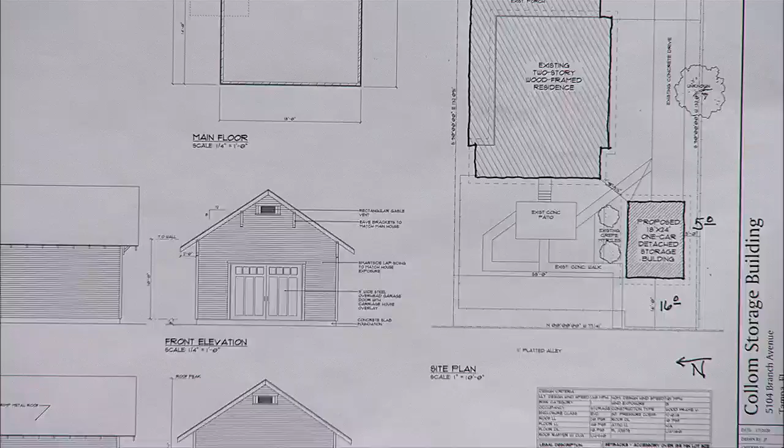Okay, the driveway doesn't seem to have any notes as to modifying the driveway. Is there scope in this project for realignment and grading? It's not that easy right now to figure out where the concrete stops and where it's going to run into this. I drew a line - that's the full extent of the work where the concrete would go. But yes, it's going to need at least a certain segment extended or expanded a little, depending on where it ends up.

In terms of materiality, what would that material be for any new pavement? Concrete - once you figure that out, it would just continue the concrete. This is concrete.

Could you show an image of that? I don't think we had a very good image of the existing condition in front of that. Do you have an image of what that looks like? It's very hard to photograph. I don't know if this helps at all, the survey - it says garage on there, but it's definitely not a garage. You can see it's got a concrete drive that goes straight up, and there's a bunch of concrete things going on in that backyard. Yeah, I'm gonna ignore all that.

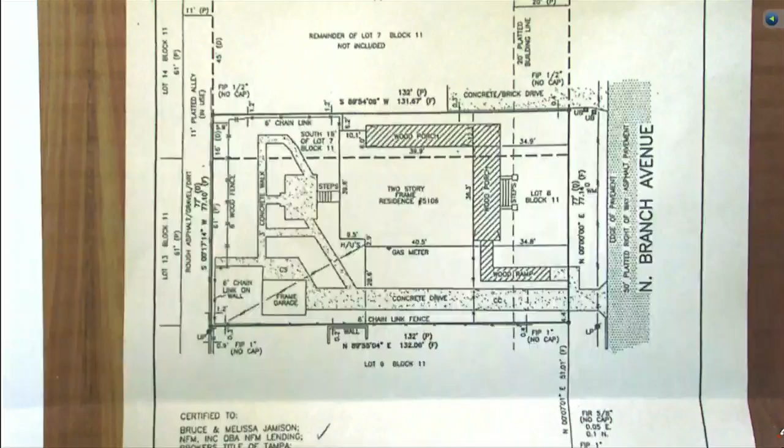Can you show an image of the front of the house? I think you had an image from the street. Ron, do you have a better one with the driveway? Mine doesn't show the driveway. Oh, okay.

So there's like a carport there, correct, that you drive into - will that remain, or is that going to go? Once the garage is in and they do some of the other work, the hope is it will go away, but it's useful right now. Okay, and that existing structure that's there now is going to be gone, and that's where you're building the new garage? Yes. Okay, I understand.

The garage door, what color is that going to be? So we... yeah, so we can't ask colors. Okay, sorry. That's all for my questions.

Is the applicant open to having a window on the north elevation of the shed? Which is what side, the alley side? Well, Ron suggested the interior facing side versus the alley, because there's a wall in the alley that's not very active - a retaining wall that changes level in the backyard. I would think the side Ron mentioned would be the best, the interior. Neil just said yes, but I know his wife had already said no - they preferred not to have a window. So if they absolutely have to, they will put in a window, but it's their preference not to have one. Okay, and I'll see what other board members have, question too.